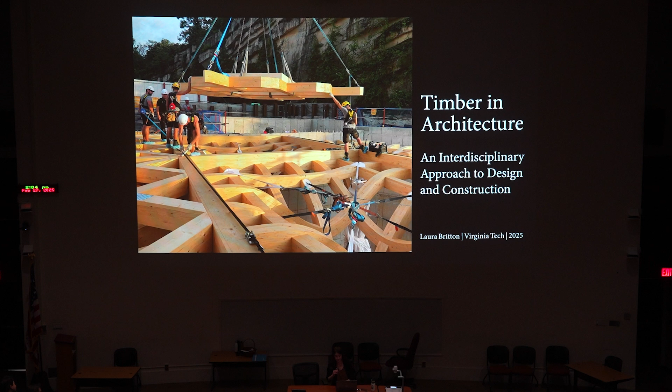To begin, Shigeru Ban Architects is a global practice. We have offices in Tokyo, Paris, and New York, and over 165 works worldwide, including paper, timber, and other materials.

Sorry, am I losing the mic? I could also just shout if that helps. Would you be fine holding it? Yeah. Okay, sorry about this. Is that okay? Okay.

In 1985, Shigeru got his first professional commission, right out of undergrad. He was commissioned to design an exhibition of Emilio Ambasz's work, and in the process, he discovered paper tubes at the center of fax paper rolls and rolls of fabric. He decided this was too useful of a material to throw away, noting that the paper tubes were strong, lightweight, inexpensive, recyclable, and available worldwide.

Later that year, he was commissioned to design an exhibition of the work of Alvar Aalto. He had initially hoped to use wood as a nod to Aalto's Viipuri library ceiling, but given the cost and waste associated with using this for a temporary exhibition, he opted for paper tubes instead.

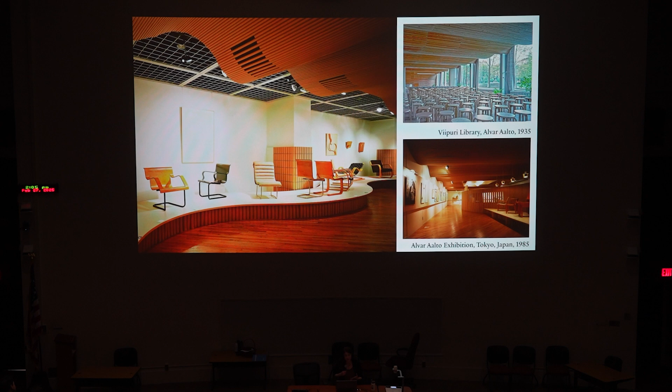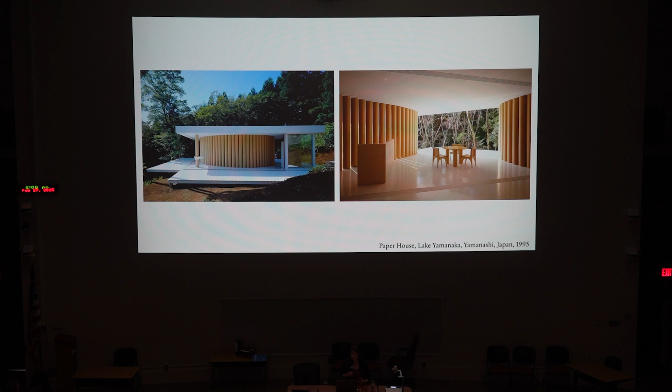A decade later, in 1995, Shigeru designed a weekend home for himself called the Paper House. It's the first building in the world that was permitted to use paper tubes as primary structure. But Shigeru often jokes that he hasn't seen it since because he just doesn't have the time.

This paper tube work is probably a bit more familiar as Shigeru is constantly engaging with humanitarian work. He's designed disaster relief shelters around the world, and this typology is called the paper log house. In the upper left, you can see the original paper log house from 1995 in Kobe, and the other images on screen are more recent iterations, adapted to the local climate, culture, and construction practices.

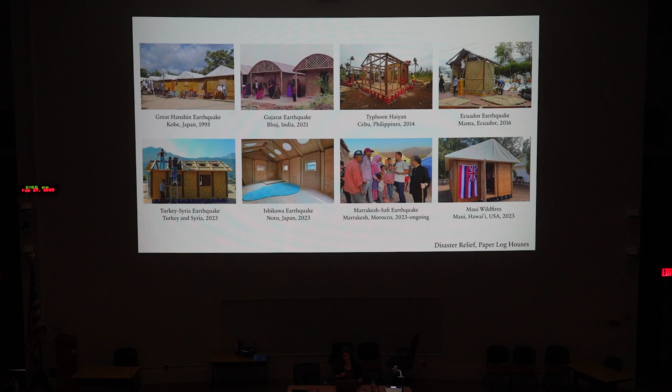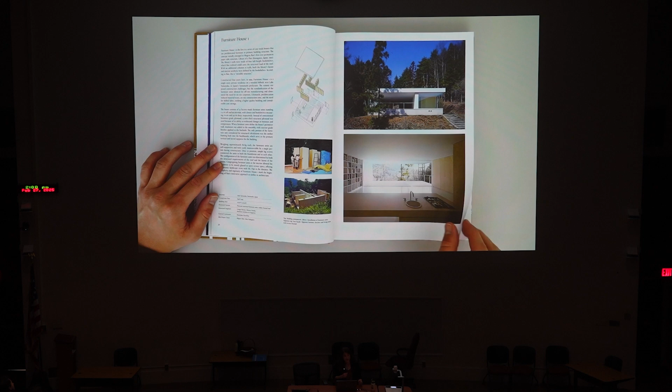So we'll take a quick look at Timber and Architecture. The book begins with three guest essays to contextualize the importance of the subject of timber. There's a foreword by the environmentalist Paul Hawken, and then Shigeru's own essay, Why I Love Wooden Architecture. Next, we have Hermann Blumer's recounting of his career trajectory from carpenter to timber engineer. The body of the book presents 45 works from conception through to the completion of construction, as Noah mentioned, which demonstrates the merits and challenges of building with wood.

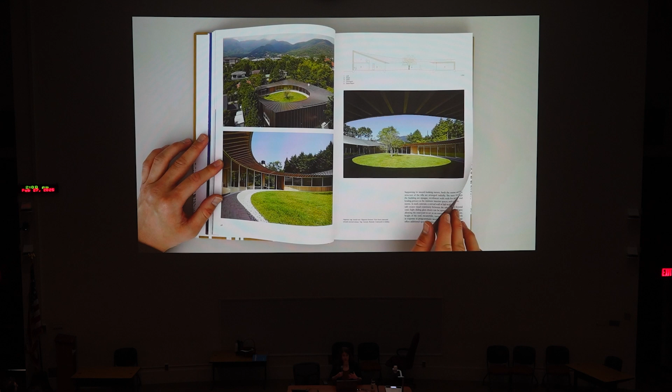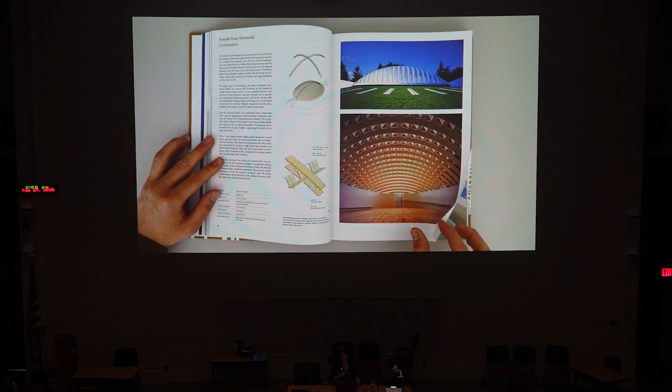This isn't just the glossy finished image of what we wanted the building to be, it's all the struggles that it took to get there and how constraints informed the design process. The projects range in scale, budget, and program, from prefabricated wooden houses to parametrically modeled glulam grid shells, showing the true spectrum of what you can do in wood.

The book concludes with an index of all of the work that Shigeru Ban has done in wood, both unbuilt and built, and also our current work in timber. SBA has more than 75 built works in timber around the world.

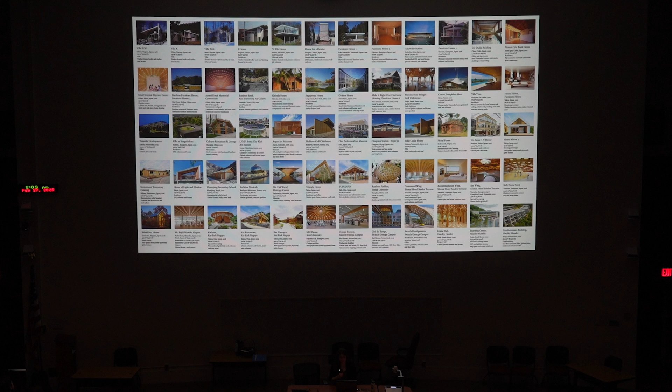One important point in organizing this book was not to go chronologically from the 80s to the present, but instead to arrange the projects thematically according to structural typology. This helps show the influence of budget, code, regional tree species, access to skilled labor, and even the local fabrication capabilities.

But before we dive into the projects themselves, we have to stop and ask: why wood? This is something that my colleagues and I are asked nearly every time we present.

Wood is a beautiful, versatile material with diverse structural possibilities. It's sustainable and renewable and can often be locally sourced. With off-site fabrication, timber construction sites are typically cleaner and safer, and construction schedules are typically quite short.

You may be familiar with the term biophilia. People naturally feel better and healthier in buildings with visible natural materials, and psychological studies have shown that this also increases productivity.

Now more than ever, it's imperative that everyone from architects and builders to clients and even the general public gain an understanding of how construction impacts the environment. Issues of waste, permanence, and material selection are crucial considerations in a holistically sustainable approach to design and construction.

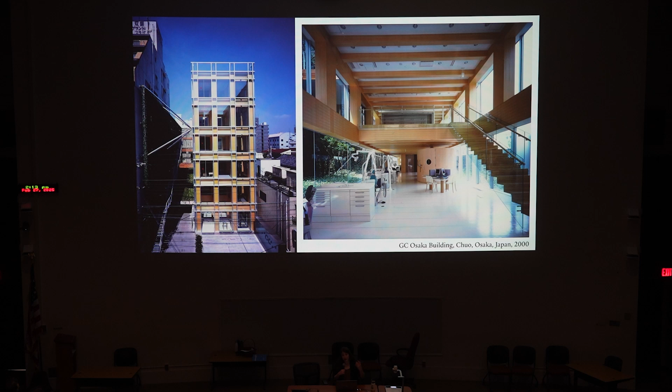This is an older project, about 25 years old. Ironically, Shigeru found that in Japan there are some of the most restrictive building codes, so he can't build in mass timber in most urban conditions in his own home country. The misconception in this case is that mass timber buildings are not safe, but in actuality, the building code just hasn't caught up to the realities demonstrated by fire testing.

Shigeru grappled with this in the year 2000 when he was commissioned to design a new office and showroom for a dental company. Since a timber structure wasn't allowed, he opted to work with steel for its strength and ability to span long distances. Steel typically requires a fireproofing layer known as encapsulation, which could be drywall, for example, preventing structural damage in case of a fire. This is typically clad with a finish-grade material to improve the appearance.

But subverting the logic, Shigeru demonstrated to the code officials that wood could actually be used to fireproof steel. Fire resistance tests demonstrated that 50 millimeters of wood, about 2 inches, adequately addressed the building's 1-hour fire rating requirement. So he used 2 layers of particle board with a finished layer of plywood to encapsulate the steel. Despite not being a timber structure per se, the building retains the warm aesthetic of wood.

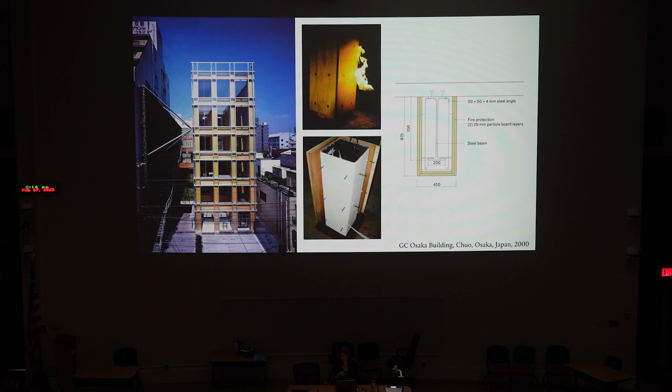More recently, he had a similar set of conditions, again in Japan. This is Tamadic Nagoya. The aerospace and automotive engineering company was particularly interested in biophilia, wanted a mass timber building, but was not allowed to have a mass timber building in an urban context here.

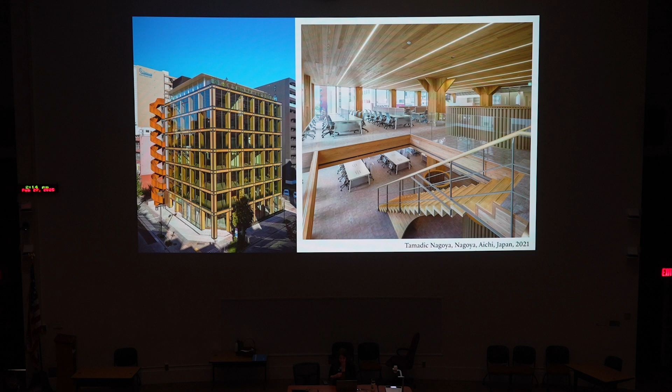So to satisfy the client's aesthetic and environmental desires, this 8-story building uses CLT, cross-laminated timber, as permanent formwork. So in the diagram on the right, first the rebar is set up, then a box is created with cross-laminated timber, it's filled with concrete, and instead of removing that formwork, it's left in place as the interior finish for the building.

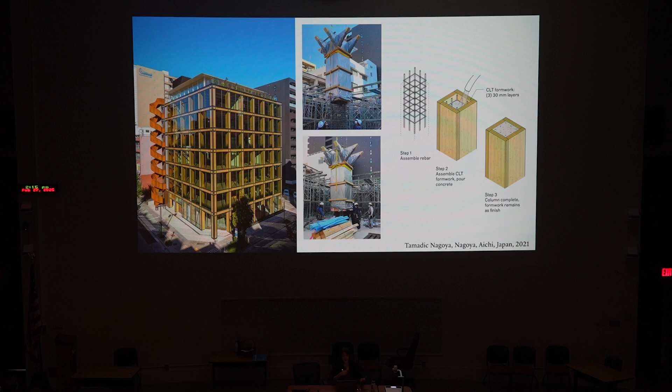The use of permanent formwork has many benefits, most notably the biophilic benefits of wood, and a shortened construction schedule from not having to remove that formwork, but also a reduced carbon footprint by not having this sacrificial material that would literally have gone in the trash. Additionally, no further materials were needed for a finish layer.

Returning to our list, the availability of materials and skilled labor could also be a deterrent for using timber. Simply selecting wood doesn't make it a sustainable choice. For example, if you're considering spruce from Switzerland and your project's in California, choosing that wood does not make it sustainable. And sometimes the topic of local materials is less about what wood species are regionally available and more a matter of which building materials are locally available.

So in one of SBA's early projects, Shigeru was commissioned to design a house on a remote wooded hillside. It was very difficult to access with construction equipment. And so the only material that Shigeru could get to the site was plywood.

He decided to design prefabricated plywood furniture units - closets, bookshelves, other casework. And that casework was then used as the structure for the building. So instead of having freestanding columns, he had a bookshelf that acted as a column.

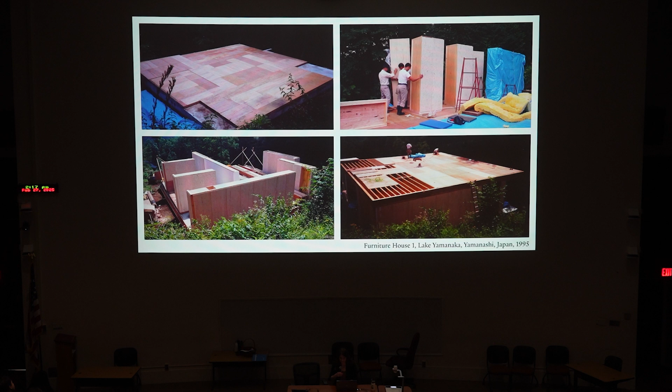So as we continue through this list, hopefully you come to understand that these potential pitfalls are also opportunities for innovation. It's the chance to think creatively and materially and to engage structural engineers, fabricators, builders, material testing facilities, and code officials, among others.

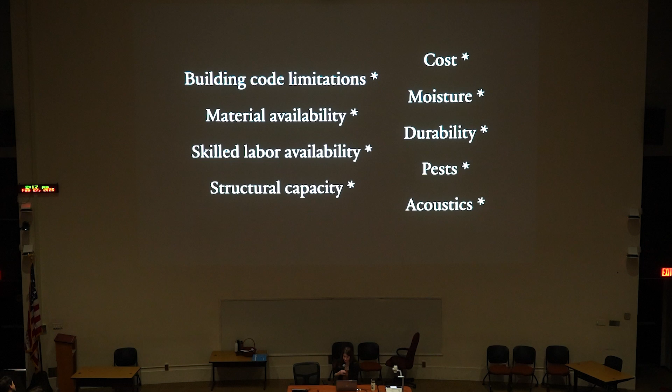So that's all the common sales pitch for why wood. That could apply to any architect from any firm who wants to use the material. But why specifically does Shigeru Ban have an interest in wood?

Shigeru actually wanted to be a carpenter when he was young, and so he's always had this specific, tangible relationship to the material. And he acknowledges the limitations of wood - that's precisely what intrigues him. So similar to that list of why not wood, he wants to operate in that space of trying to find the problems and exploit them.

Whereas steel and concrete can easily take on any number of shapes, you really need to understand the properties of wood to optimize its structural form. And by leaving timber unencapsulated, this allows the material to serve as both structure and finish, which is a materially authentic approach, expressing the beauty and efficiency of rational structural forms.

To do this, we need to collaborate. So from the outset, SBA engages a core team of engineers and fabricators and builders to see these real-world constraints as opportunities. Shigeru has great respect for his collaborators, so his introductory essay in the book is devoted to his close working relationship with these three structural engineers: Gengo Matsui, Frei Otto, and Hermann Blumer.

With Gengo Matsui, Shigeru brought his early paper tube concepts to fruition, advancing beyond simple upright columns to complex building forms. This was further advanced with Frei Otto. Here, Shigeru fully delved into form finding, and you can see the influence of Otto's Mannheim Multihalle on Shigeru's Japan paper tube pavilion.

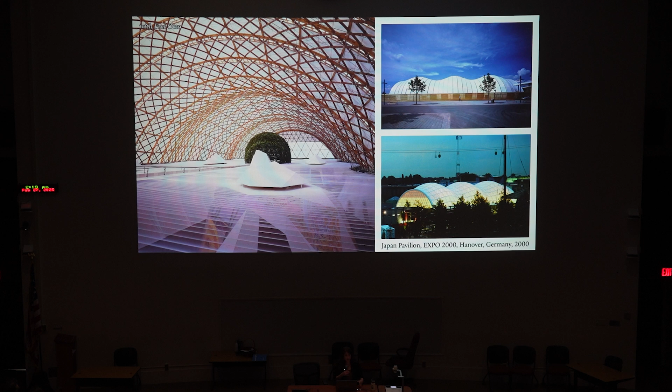Okay, does everyone know what mass timber is? Yes, okay. We'll do a very, very brief overview here.

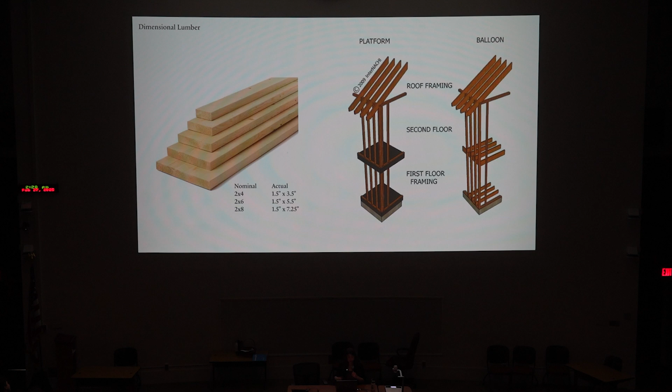In contrast to dimensional lumber, which is composed of a single piece of wood cut from a solid log, engineered wood products are manufactured wood products. They're a composite that could be made from wood veneers, strands, particles, and either an adhesive, nail, dowel, etc. So graduating in size, mass timber is also an engineered wood product with lumber from small diameter trees bound together by the same adhesives, nails, or dowels.

And this has two primary advantages. First, it dispels any myths about cutting down the rainforest - no, we're using small diameter trees, so we don't need old growth trees. Second, because it's a composite, mass timber is actually a standardized product with predictable strength characteristics. So by using multiple pieces of wood in a single member, you're homogenizing the structural profile.

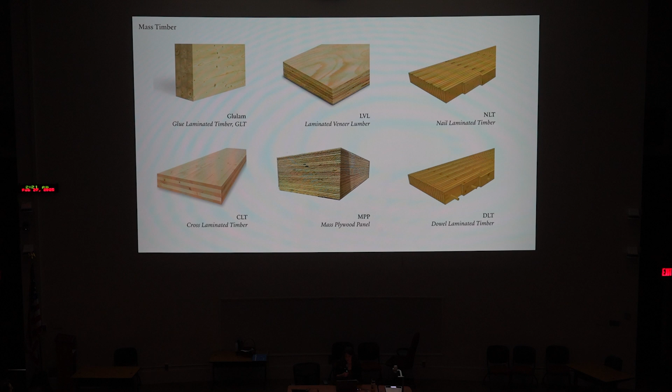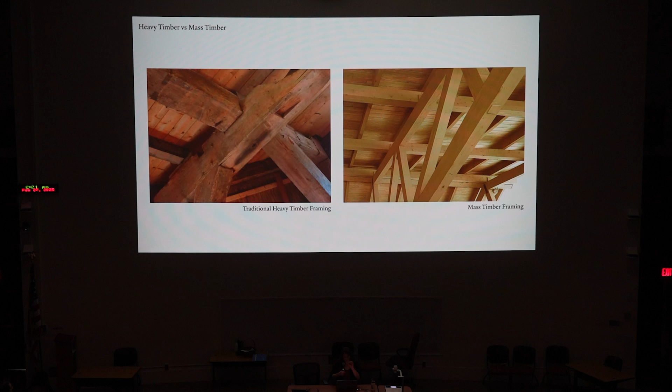Common examples of mass timber include glulam, cross-laminated timber or CLT, LVLs, DLT which is dowel laminated, NLT which is nail laminated. Mass plywood panel is a newer one, that's MPP, and dowel laminated timber, which is DLT. So on the left here, you can see an example of heavy timber, so that's solid wood. And on the right, you can see an example of mass timber, where you might be able to see the tiny joint lines in those individual beam members.

Before we actually dive into the projects, we'll do a quick recap of 10 key considerations to keep in mind when you approach a mass timber project. These points are applicable regardless of the complexity - whether it's a simple house or a complex grid shell, these considerations remain the same.

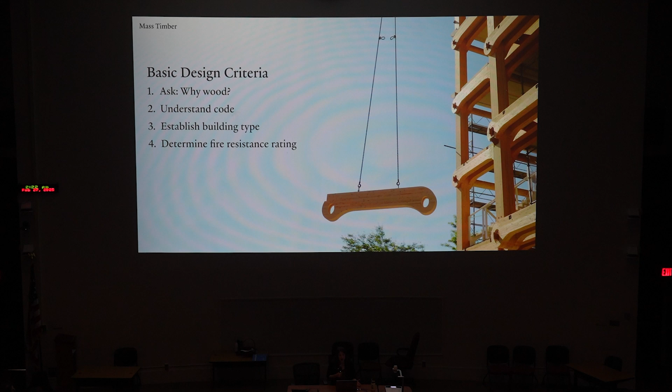So first, we have to ask, why wood? Is this the right material for the project? Oftentimes, a hybrid solution is the appropriate response. Next, we review the building code to understand what you can do in a given jurisdiction and establish the building type and the fire rating.

From here, we can establish the structural grid, and that would involve considering spans and member sizing in relation to vibration and deflection. Once the grid is established, then you can think about the MEP strategy. Are the building systems going to pass through the structure or bypass it on the underside or above? Will it be exposed, etc.? And lastly, how do we optimize the volume of wood to both minimize material waste and site erection time?

And then we can think ahead to constructability. Design for economy might not sound like the most fun topic - it's literally the most fun I have all year. It's like trying to solve a puzzle with the smartest engineers you can imagine. So ideally, you want to meet with these potential engineers, mass timber suppliers, etc., at the outset of the project so that your design is informed by these real world factors.

As you're considering species of wood, you have to think, is it native? If you're in the Pacific Northwest, you're most likely thinking of a spruce pine fir material. Or if you're in the South, it's more likely a southern yellow pine. You also want to consider the manufacturers and fabricators' geographic proximity to your site. So if you're building in Arkansas, you want to use southern yellow pine, but the best fabricator you know is in the Pacific Northwest. It makes no sense to source your materials locally, ship them up to Oregon, and then ship them right back down again. You might as well use materials in Oregon at that point.

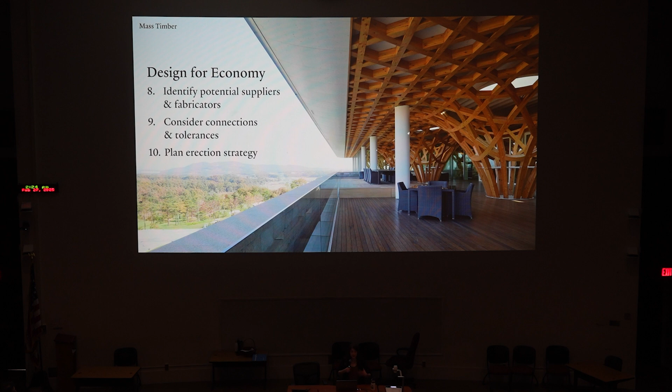And lastly, you begin to outline the site erection strategy. This is something we're often doing in schematic design, and it incorporates everything from how many truckloads of material it takes to get to the site, to how you stage the site to plan for construction.

We'll spend the remainder of our time looking at three primary structural typologies. First is post and beam. Next, we'll have space frames. And lastly, grid shells.

I know many of you have spent time in Switzerland and seen this project. I'm very jealous of Edward's class and wish I could take it as well. This is the Tamedia headquarters, our office's first building in Switzerland, and also the home of Hermann Blumer, who was the structural engineer for this project. Tamedia is the largest media company in Switzerland, and they've occupied the same riverfront site since the early 20th century. The client had three primary goals for a new 7-story building.

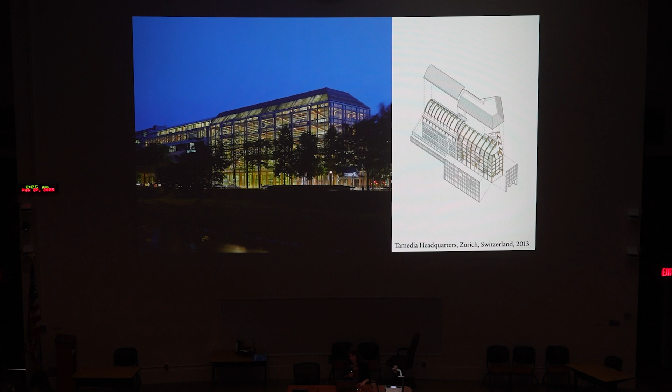The first was to create a workplace that feels like a living room. Next was to make the building feel transparent, both literally and metaphorically as a media company. And last was to maintain a reasonable budget. In response, Shigeru devised a timber post and beam structure wrapped in a glass curtain wall.

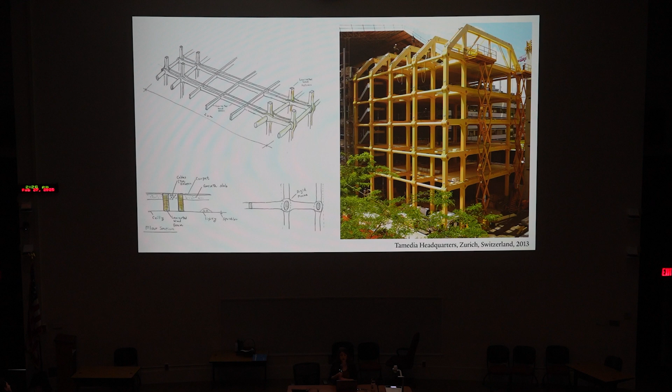The glulam columns and beams interlock in these innovative joints, which are secured by an elliptical dowel that prevents rotation. There are no metal connections. This form is both functional and elegant.

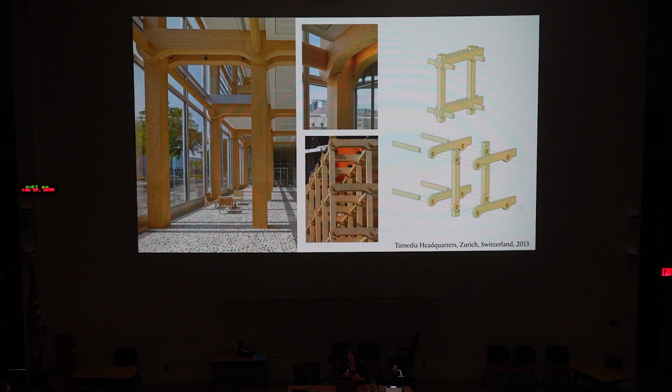Hermann identified that the structures were too large for the spruce beams alone, and spruce is a softwood. So he concealed a reinforcement plate, which you can see in the diagram on the right as the darker shaded portion. Those are made of beech, which is a hardwood, and this is a technique we often employ to use hardwoods to handle these higher stresses. This is a great example of a design concept that originates with Shigeru's sketch and is then further developed in collaboration with a consulting partner, the structural engineer.

Next, we'll move on to space frames.

If you ever have the chance to visit Aspen, Colorado, that's the home of our largest project in the US. This is the Aspen Art Museum. It has a woven wood and paper composite facade, evocative of the color and rhythm of the brick buildings that surround it in Aspen. This porous screen facilitates views into the museum as well as out towards the mountains.

Here you can see two views of the Grand Stair, an indoor-outdoor interstitial space behind the woven screen. Similar to the experience of skiing, the museum was designed to be circulated from the top down, so you ascend via this Grand Stair and then descend through the galleries.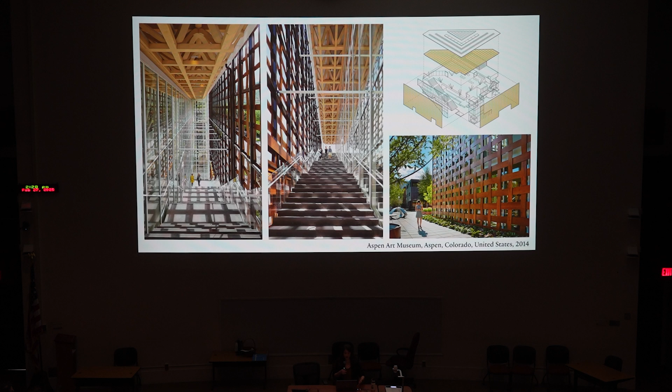Shigeru believes that the natural context is as beautiful as the art itself, so it's important to highlight the stunning views of nature first. Here you can see the timber space frame, which extends from the rooftop plaza into an indoor cafe.

The building is arranged according to the thermos principle, developed with Transsolar, a firm of climate engineers. In this setup, climate-sensitive galleries are concentrated at the heart of the building and surrounded by less climate-sensitive spaces such as lobbies, hallways, stairs, and offices. This minimizes temperature and humidity fluctuations, which is important for the proper care of fine art, and it also allows the perimeter zones to take advantage of the great views of Aspen.

For comparison, on the left we have Shigeru's initial sketch, and on the right the digital model used for fabrication. They're again quite similar.

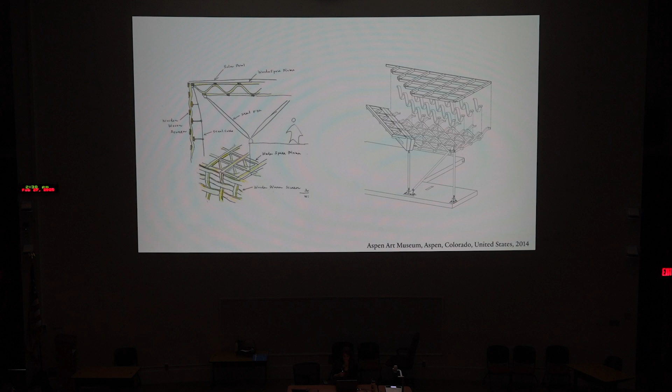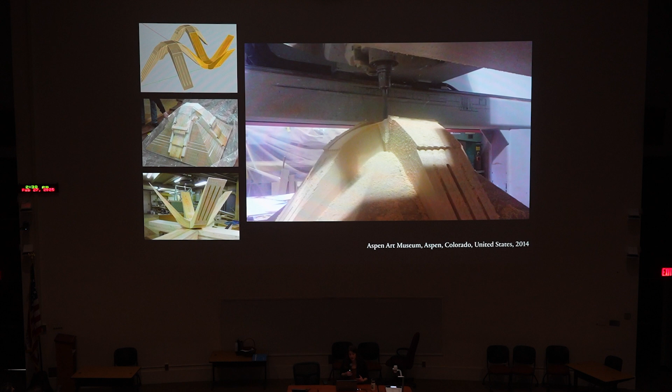But it isn't as simple as starting with a structural engineer. It was very difficult to figure out the approach for fabricating this. This timber structure went through several iterations, but ultimately cost was a driving factor as well as minimizing material waste. Here you can see some of the initial studies, which included bending and CNC routing. But ultimately, the webs were cut two-dimensionally from custom Baltic birch plywood, typically used for furniture.

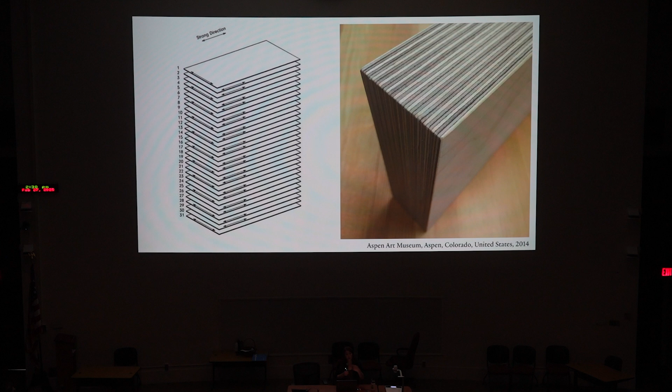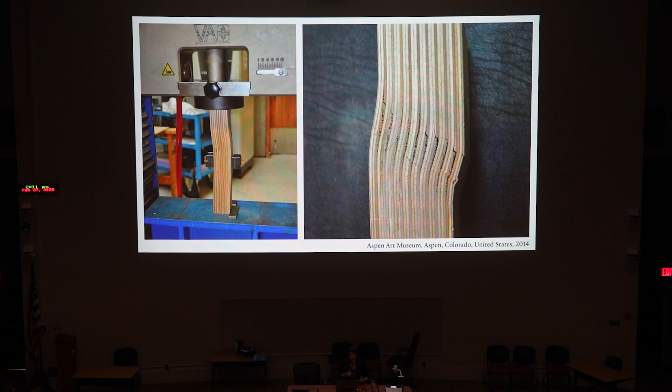I'm saying custom here—perhaps you can see in the image on the left the notation at the top that says strong direction. There are two plies that run in that direction for every one ply that runs in the alternate direction. This approach had never been done before for a building structure, so extensive testing was required to demonstrate the strength of the material.

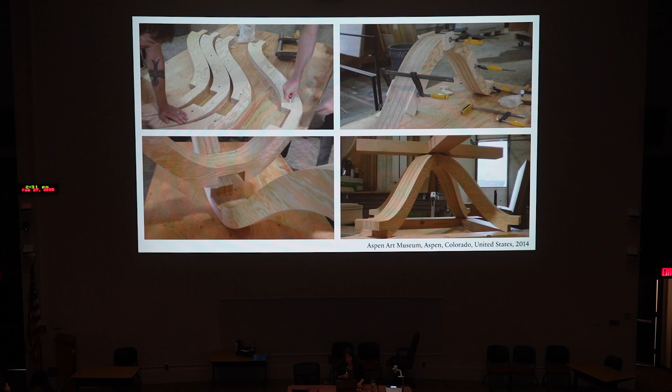Here you can see a mock-up of the timber structure being built. For the final design, spruce, a softwood, is used for the chord, whereas birch plywood was selected for the webs. Birch, a hardwood in this case, was used for these strong connections to reduce member sizes. And as you can see on the left, the web members are joined together with half-lap connections.

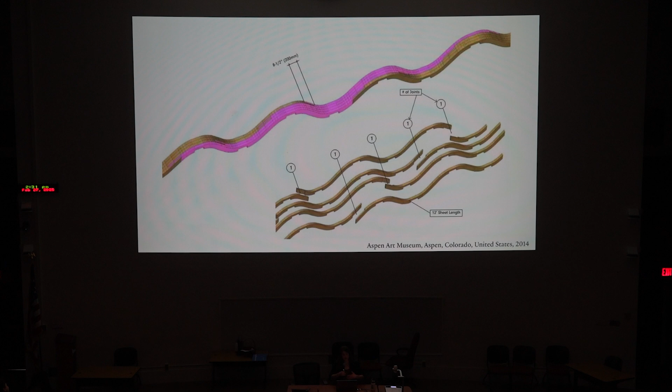The plywood came in 12-foot lengths, which were then half-lapped with scarf joints to create these longer members. In the upper left, you can see how these webs came together in Spearhead's shop—Spearhead is a fabricator we used for this project. The timber components were fabricated and shipped to the site in the longest possible transportable lengths in order to minimize on-site construction time.

You may notice this is a little odd for a space frame. Usually you see entirely linear members, but here you've got curved members, which may not seem as structurally efficient. However, it created more surface area for wood-to-wood connections, which prevented the use of exposed metal hardware.

This structure was developed again in conjunction with Hermann Blumer from Switzerland, as well as Greg Kingsley from KL&A, who introduced me to Edward, and I'm very grateful for that collaborator partnership. You're going to hear again and again these same firm names coming up, and it's not out of favoritism—it's out of this belief in continually advancing a project. So when you continue to work with the same individuals over and over, you take missed opportunities from past projects and build on them, add to them, and grow and advance the discipline itself.

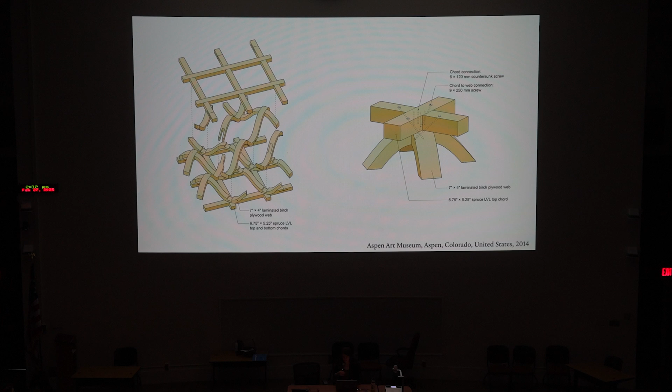So like the Aspen Art Museum, this is Triangle House, which features a space frame for the roof. But this is a much smaller scale, again for a private client. This building includes an 8-person office with a private residence above. The lower floors have a concrete structure to economically hold the load above, while the space frame roof allows for this large open living space on the top floor.

Despite the space frame being nearly a meter deep, there's plenty of daylight here. The space frame was made from European pine, selected because it was economical and readily available. At each node, up to 9 timber members intersect, as you can see in the lower right—that's a rather complex joint.

Hardwood joints, like what we had at Aspen, were considered here originally, but this wasn't possible due to the particulars of Japanese building code. So instead, a concealed steel plate was used—it's ultimately a simpler joint. It wasn't the preference in terms of design and structural resolution, but it demonstrates that regardless of challenging constraints, you can achieve the design vision you seek. You just have to find alternate methods of execution.

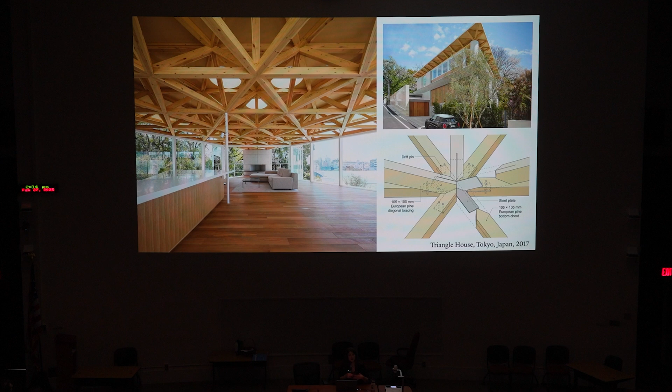Now moving on to grid shells. The Centre Pompidou Metz is perhaps one of Shigeru's most iconic buildings and one of the most well-known mass timber structures in the world. This also happens to be the first mass timber building that our office completed.

And though it's hard for us to imagine today, the client initially suggested switching to a steel structure, as did the original structural engineers for this project.

So in 2003, long before I joined the firm, the Centre Pompidou hosted a competition to design a new museum outside of Paris. The intent was to show more of their 120,000 works, but also to show larger works that wouldn't fit within the 18-foot ceiling of the original Centre Pompidou.

Given the architectural significance of the original museum, Shigeru saw this as an opportunity to build an unprecedented structure.

The museum was designed as an open pavilion in a park. So unlike its peer institutions, this museum is not a walled-off museum. There aren't large, heavy stone columns. And its 16-foot glass shutters are actually retracted to connect directly to the park.

So there's this idea that this isn't a classist division of who belongs in a museum. If you're sitting in the park and you happen to want to pass into the museum and explore a bit, it makes it feel like a much more comfortable environment than if you're not really sure how to approach the building.

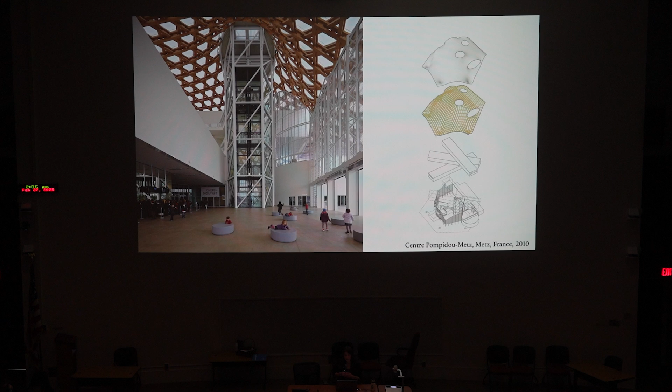Three gallery tubes below are oriented towards local landmarks. Here you can see the empty interior of one of these gallery tubes. This one is pointed towards the Metz Cathedral. And the idea is that you can locate yourself within the city while you're in the building.

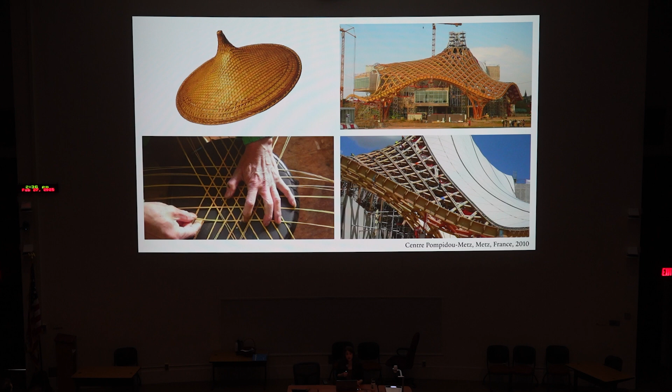For the iconic roof, Shigeru drew inspiration from two seemingly unrelated sources. The first was the cable net roofs of Frei Otto, which have a separate cable structure from the wood enclosure. And the second was the self-supported woven structure of a traditional Chinese hat, which made Shigeru question the necessity of the cable net in the first place.

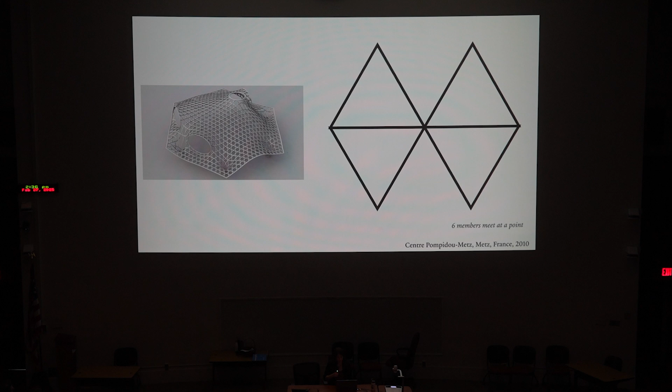In a typical triangulated grid, you'd have 6 members intersecting at a point, and this yields a very complex and expensive joint. So if you're considering the middle intersection of those triangles, that's 6 individual members coming together. But if you offset that intersection, you can reduce it to just 4 members coming together.

So here you can see the influence of the Chinese woven hat. By offsetting the grid, you simplify the method of construction. And that's the ingenuity of Metz.

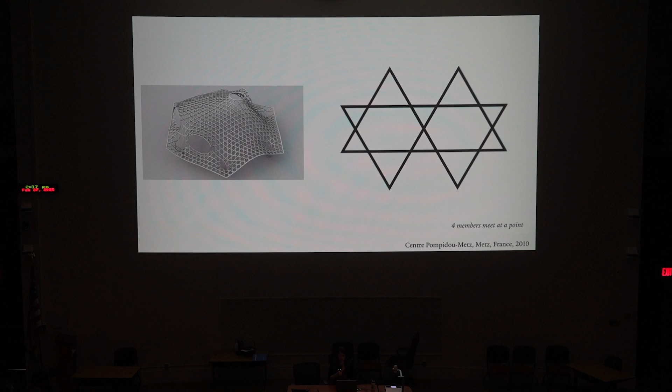The story of this building's structural resolution is really quite fantastic. So after the initial team of engineers proposed a hybrid structure, followed by a solid wood structure that was twice the roof's budget, the client said to Shigeru, no, you have to change it to steel.

But Shigeru wasn't deterred, so he went to Switzerland to find structural engineers who could take on this challenge. And at the airport, Shigeru was greeted by a Swiss man who he thought was a taxi driver. He got in this man's car, and he noticed paper tubes in the back seat. They're talking, and he thought this was a very brilliant taxi driver, and it turned out to be Hermann Blumer himself.

And this was the start of a relationship that has persisted to this day. Every complex timber project, we bring on Hermann Blumer.

Shigeru described his conundrum to Hermann, and Hermann immediately reassured him and said within a week he would have a structural solution as well as a cost estimate. So Shigeru felt a lot better, and he went back to Japan.

And truthfully, Hermann had no idea. He actually recounts this in his essay at the beginning of the book, that he wasn't sure how to do it, but he knew there was a solution out there.

Independently, Shigeru and Hermann both realized that they not only needed to simplify the grid in 2 dimensions by offsetting from a six-member intersection to 4, but they also had to offset the depth of the members. So rather than intersecting in plane, which would require a complex joint and much more complex fabrication, they actually offset the depth to allow members to bypass one another. So they're stacked.

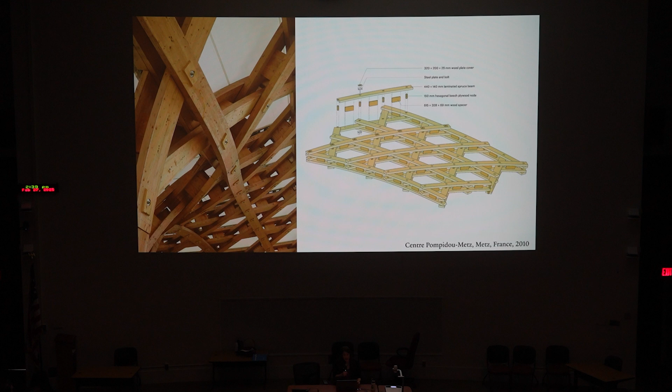The double curvature of this roof takes advantage of the digital fabrication processes that Hermann Blumer pioneered. And this was the catalyst for all of our subsequent mass timber works.

Here you can see a simpler interpretation of the Centre Pompidou Metz structure, which was adapted for a small spa in Japan overlooking a rice field. So this spa grid shell has a woven hexagonal pattern again, and the weave overlaps to allow just simple screw connections. Now we'll take a look at tree columns, which are also a variation of grid shells.

I know some of you have seen the evolution of this structural typology in Blumer Lehmann's shop in Switzerland. So at the same time that Shigeru was designing the Centre Pompidou Metz, he was also developing the Nine Bridges Golf Clubhouse, which is a noticeably different grid shell form. The building is essentially a box with a flat roof, but it's supported by these 3-story tall columns. Each column is arranged with a series of 12 radially oriented individual timber members. And you'll notice that the structure bears the same hexagonal and triangular grid pattern as the Centre Pompidou Metz.

However, this has a higher density of timber. So it's more slender members spaced closer together. And this allows for a more surface-like reading of the roof structure. So it reads kind of as a continuous form rather than spaced out apertures.

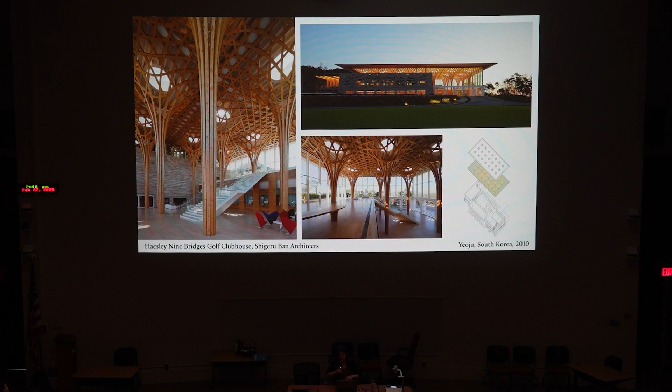The tree columns here are constructed from 3-dimensionally curved German spruce glulam, which takes advantage of the wood grain to take on a structurally efficient form. A more typical low-tech approach would have been to cut these shapes from a large flat sheet, but this method would have been materially wasteful, expensive, and less structurally efficient.

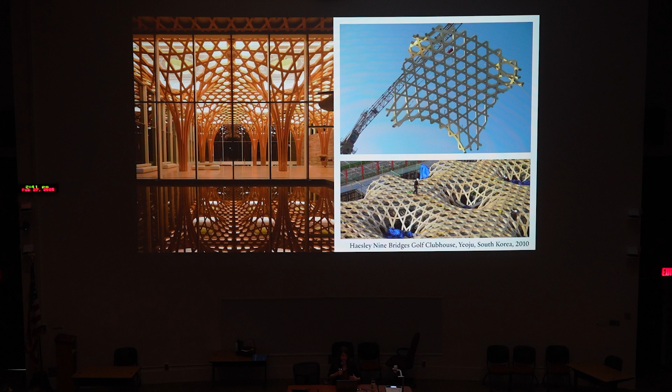10 years after the completion of the Nine Bridges Golf Clubhouse, the same client commissioned Shigeru to design another project on the site, and they wanted it to be evocative of the original building, but not a copy. So here, Shigeru was tasked to design media and executive training facilities for the golf club. For the main event rooms, Shigeru proposed that they be subterranean because it's very important for a golf course to be quite quiet. So the timber structure on the left, despite being really daylit, that's an entirely basement structure with skylights above. You might notice that this structure is quite a bit heftier than the original Nine Bridges Golf Clubhouse.

There are a few reasons for this. First, in the 10 years between the two projects, the Korean building codes changed. So that required more oversizing of the timber structure. And second, instead of having the twisting 3-dimensional curvature, here the wood members only bend in 2 dimensions. So you have an orthogonal grid here. And that allowed it to be built by local builders instead of the builders from Switzerland.

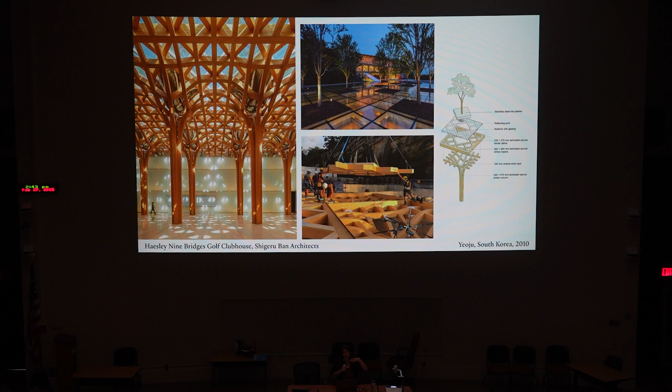And so the entire roof surface here, in addition to being skylights, has a layer of a reflecting pool. And then these tree planters with integrated drainage down the center of the columns. So adding all of that water and soil on top of the roof structure adds quite a bit of weight to it.

This project was also designed to be fabricated in Japan, meaning that it had to be quite a bit simpler than what was also possible in Switzerland a decade ago. So all of these moves to simplify the structure also meant fewer connections.

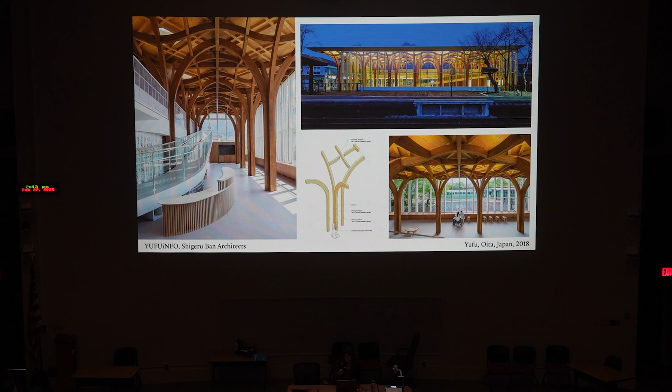So these three projects taken together highlight how a similar structural system can be adapted differently depending on budget, code requirements, and access to skilled labor. It also shows how collaboration with structural engineers and fabricators plays a large role in the actual image of a project and how it evolves over time.

Returning to a purer form of grid shell, the last built project we'll look at is the Swatch Omega campus in Biel-Bienne, Switzerland. At over 500,000 square feet, it's one of the largest mass timber building projects in the world.

The campus integrates 3 new mass timber buildings into a historic watchmaking campus. On the left is the Omega factory, which is rectilinear. On the right, the Swatch headquarters, which is more willful. Between the two is Cité du Temps, the Swatch Omega Museum. These buildings share a design language reflecting the unified Swatch Omega brand, but also express each building's individuality through contrasting structural forms. We'll take a quick look at the rectilinear buildings, but focus on the grid shell.

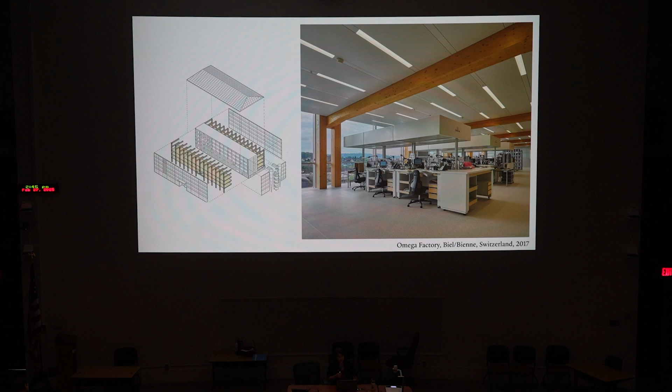The Omega factory was built first, and Omega is known as the timekeeper for both NASA and the Olympics. So it was fitting to have this clean rectilinear form representing the exacting precision of Swiss fabrication. This building is a post and beam structure with a rigid concrete core flanked by timber watchmaking workshops.

Working conditions were a primary factor here, most notably literal cleanliness. The Omega factory is the first mass timber building in the world to achieve clean room standards, because it's important not to get dust in your watches. This certification was important for craftsmanship, but also employee health, with a constant stream of ventilation keeping the environment dust-free. You may not see air registers in the ceiling because everything comes through tiny perforations in the ceiling panels, creating constant airflow throughout the day. This can create a dry environment if not managed properly.

Also, one concern you might hear about mass timber structures, if someone is building a lab building for example, is that mass timber vibrates. It's a very flexible material, which makes it safe and resilient in many ways, but this is not desirable if you're creating intricate small watches. To counter this, a concrete topping slab was added to the CLT structure to keep it from vibrating, which is necessary for making the watches.

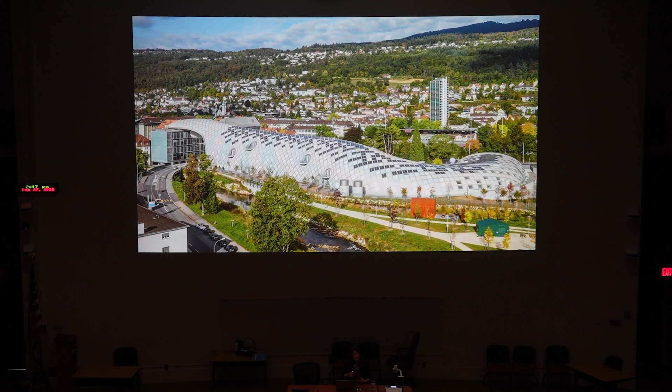In contrast to the maturity of the Omega building, Swatch is a much more playful, innovative, and provocative brand. Though the serpentine form you see here appears rather unrestrained, the facade and structure are each responsive to practical design constraints ranging from code and zoning to material properties and building services.

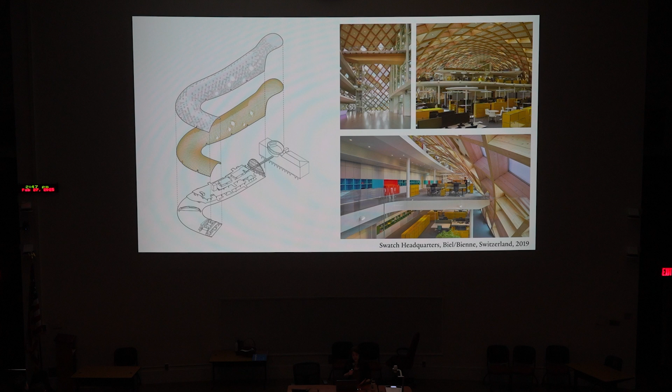The sculptural grid shell covers 4 office floors connected via 3 concrete cores. The timber structure is composed of a 7-foot grid of interlocking timber beams that seamlessly transition from the wall to the roof structure. The office space below is open and flexible, fostering collaboration.

The idea here is the entire company under one roof. There's no private office that's off limits to an executive. Anyone can be open for collaboration.

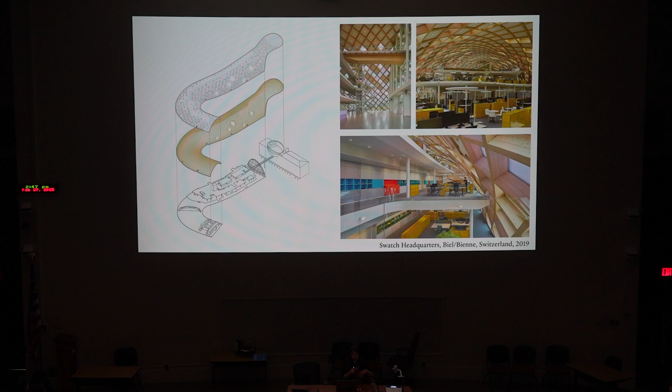The Swatch headquarters was designed in a truly contemporary manner without traditional construction documents. Instead, a parametric model accounted for the specification of 7,700 timber members with a precision of 0.1 millimeters, allowing the wood to fit together perfectly on site like a puzzle.

In a more typical building project, you might see errors impacting up to 15% of parts delivered to the site. But because of this approach with the parametric model, this complex grid shell had only a 0.11% error rate, meaning only 72 of the 62,792 prefabricated roof elements that came to site had an error.

This is a testament to the interdisciplinary and collaborative nature of this design project. SBA worked extensively with Hermann Blumer of Création Holz, as well as digital facilitators Design to Production, who created the digital fabrication model and resolved all the conflicts that would have occurred from integrating building services into this project.

This dynamic team has worked together for nearly 2 decades, beginning with the Centre Pompidou Metz. A fun side story is that we didn't actually know this entire consulting team had worked together on Centre Pompidou Metz — the digital facilitators were contracted directly by the builder on that prior project. As we learned who had a hand in creating these projects, we began bringing them in earlier and earlier to use their expertise from the outset.

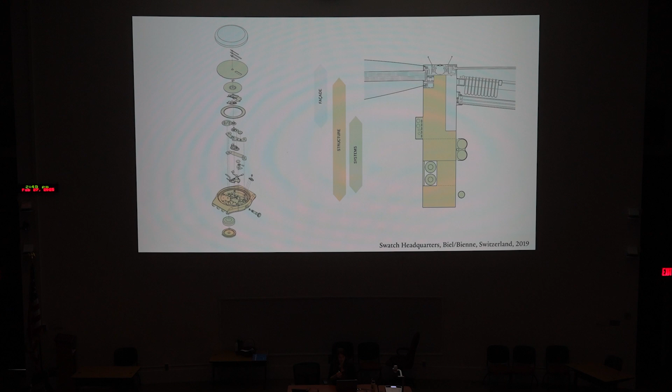So here you can see the building envelope, which integrates structure, building services, and the facade. Since the maximum footprint of the building was fixed due to site constraints, an unnecessarily thick facade envelope would have reduced the building's usable floor area, and this wasn't viable for the client.

So to resolve this, Shigeru drew inspiration from the original Swatch watch. The reason Swatch watches had become famous was that they integrate components directly into the plastic case of the watch itself, which reduced both the cost and the thickness of the watch. Shigeru's approach here was similar.

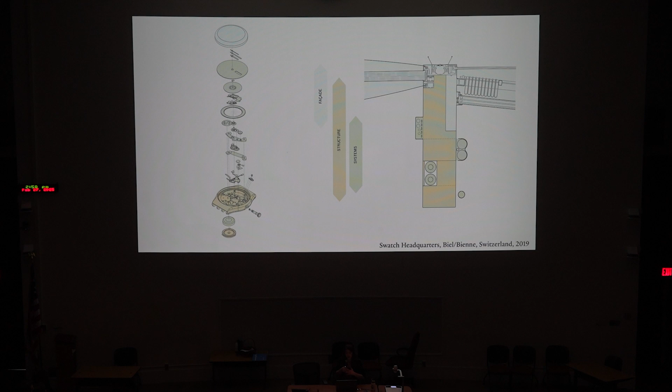Instead of layering discrete, separate layers of structure and then building services and facade on the outside, he allowed them to pass through one another. The facade nests into the structure, and the building services pass through the timber structure.

This is quite a bit more complicated to coordinate, and hence why we worked with Design to Production. So prefabricated openings were tailor-made to the size of electrical cables, sprinkler pipes, and cooling pipes, with cutouts staggered and mindful of the wood grain so that the structure would not be weakened.

The roof is a 120,000 square foot surface with 2,800 apertures arranged in a very spirited pattern. It might seem randomized, but each has a particular reason.

First we have the ETFE cushions, which are white and pillow-like. If you're not familiar with that material, it's kind of like a fabric sheet. You can see through it, it's translucent, it glows in the daylight. And if you're looking at it from the exterior, it'll glow at night when the lights of the building are on. This is a great material for diffuse daylighting, which helps to create a glare-free environment for offices.

Next, we have CLT panels at the high points of the roof to reduce solar heat gain, and PV panels on the top and the south side to offset the building's energy consumption.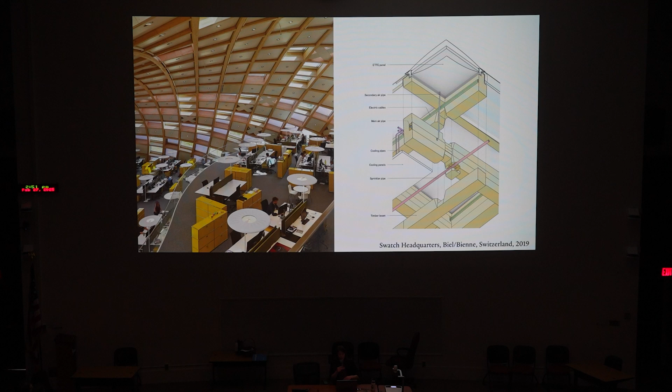The Swiss cross form that you can see towards the middle of that image actually acts as both structural bracing and acoustical absorption. And at the lower level, that's the only place where there are glazed panels because there are views out to a neighboring park.

The Swatch grid shell reaches over the street and sits atop Cité du Temps, which is the third building on the site. This museum and conference center acts as the interface between the Swatch and Omega brands. An interesting issue to consider here is the differential movement of each of these buildings.

This museum incorporates the architectural language of its neighbors, with playful concrete arches at its base and a rectilinear timber structure above. The mansard roof is evocative of the campus's historic buildings.

The Omega factory has a concrete core and topping slab, but Cité du Temps is an entirely timber structure above the ground floor. So it has glulam columns and beams, and CLT floor slabs and core panels.

This is an outwardly simple building, but the interfaces require great attention to detail. As you saw on the previous slide, the Swatch grid shell sits right on top of this building, and on the opposite side, it actually connects to these historic buildings on the campus.

Despite being such an enormous project, the buildings were constructed from 160,000 cubic feet of certified Swiss timber. It's kind of a difficult number to wrap your head around, but considering the growth rate of Swiss forests, it would only take 10 hours to regrow this quantity of wood domestically. That's 0.1% of Switzerland's annual timber production to create what we think is the largest timber building project in the world.

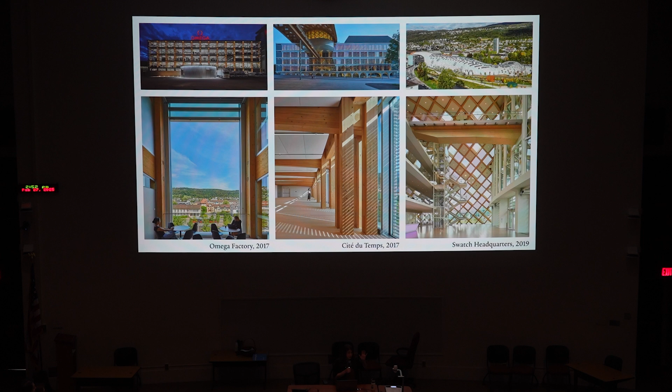To conclude, we'll take a look at just one project our New York office is currently working on, which is the Kentucky Owl Park. This is a 500,000 square foot bourbon distillery in Bardstown, Kentucky, sited on a 420-acre reclaimed limestone quarry.

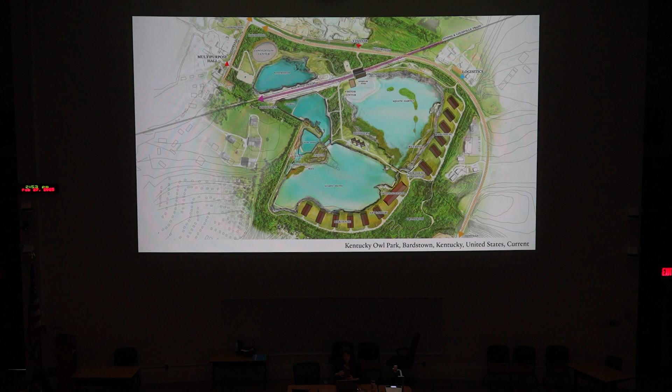This distillery sits on a peninsula at the center of the site and is surrounded by production buildings, including a bottling center, a craft cooperage, which is where the barrels are made, rick houses where the bourbon is aged, as well as a visitor center and a train station.

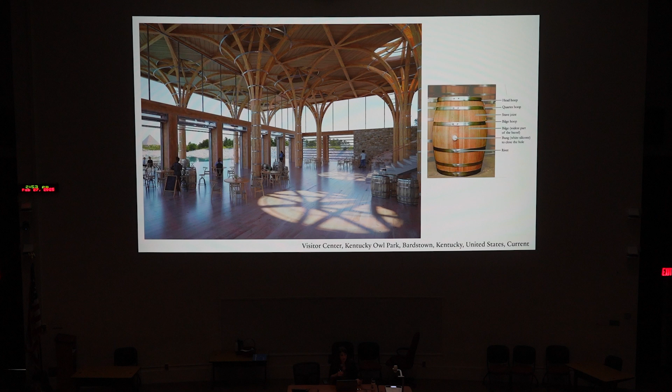For the visitor center, we drew inspiration from the structure of a bourbon barrel itself. The dendriform columns are a combination of timber and steel, evocative of the wood staves and the steel hoops that make up a bourbon barrel.

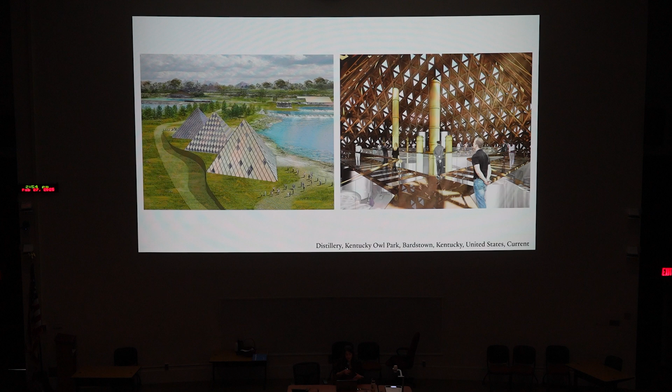And the shape of the pyramid actually comes from Shigeru's pragmatic idea to efficiently house this 60-foot tall column still at the center of the building without creating a large rectilinear mass in the center of this site. So this minimizes the overall volume of the building. And then in the last pyramid, the bourbon is bottled in preparation for aging.

The roof structure here might seem quite familiar. It's an evolution of the Aspen Art Museum's wooden space frame. So here again, with each project, we're building on past studies, but the complexity here comes from the angle of the space frame and how the 4 faces of the pyramids meet and come to those joints at the intersections.

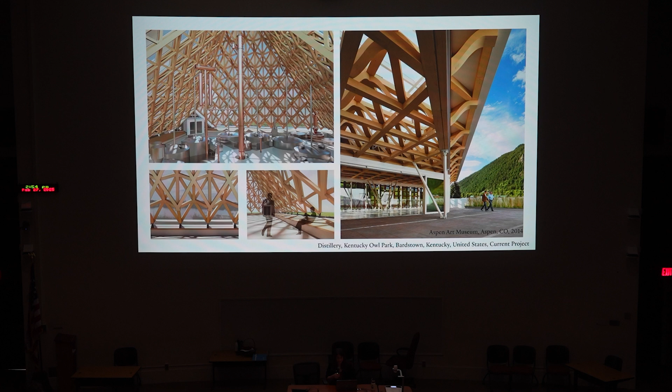To do this, we once again teamed up with the structural engineers from Création Holz and KL&A, as well as design facilitators Design to Production and fabricators Spearhead.

This is a sheet from our schematic design set. We call this a reference geometry drawing. So in the diagram at the left, green represents the outer face of glass, blue is the top face of the upper chords, and red is the bottom face of the lower chords. So in actuality, we're studying 3 nested pyramids geometrically.

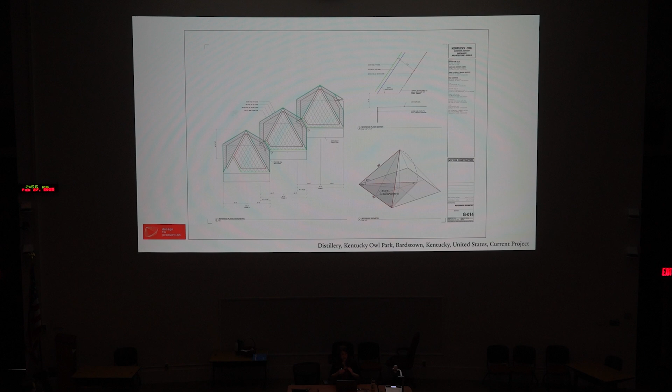And we document this geometry through trigonometry rather than rounded numbers. So we keep a parametric approach as long as possible because changes are bound to happen and the complexity only increases over time. So our clean 90-foot dimension applies to the outer face of structure, which aligns over the foundation.

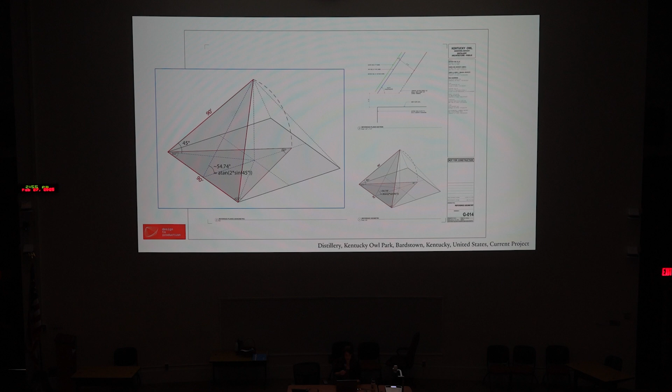And then we begin to consider facade module sizing. Not sure if you can read all of that down there. It's quite crazy to have that as your dimension string.

So this is schematic design. We don't know who our facade manufacturer is yet. This needs to stay in this format until we know every last detail and we can get down to a reasonable measurable size of tolerance.

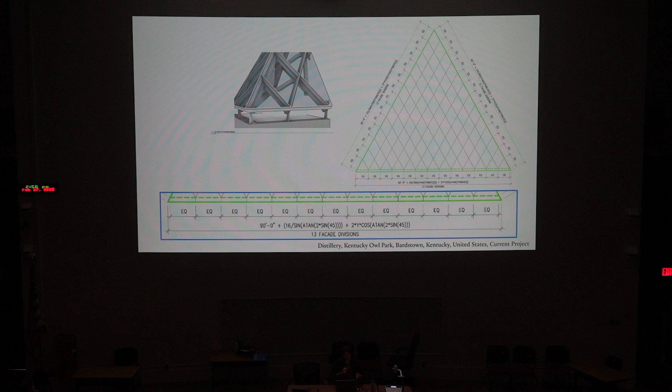In parallel, we're working with our fabricators Spearhead to optimize our material sheet layouts. So thinking about the structural form, the size that the material comes in, and how we should change our form so that we don't have too much material waste.

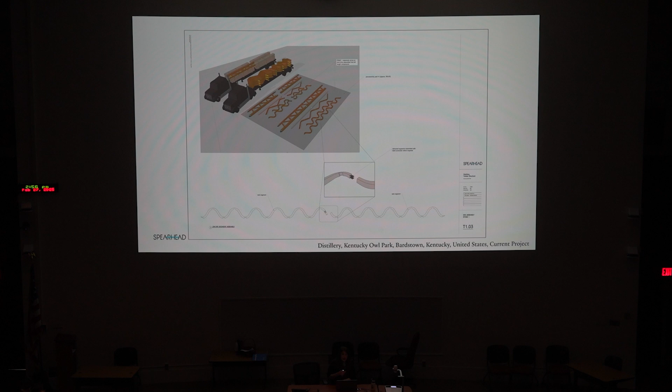And then we're considering maximal transportable lengths. So literally, what trucks can we get to the site? This gets down to turning radii driving into Kentucky.

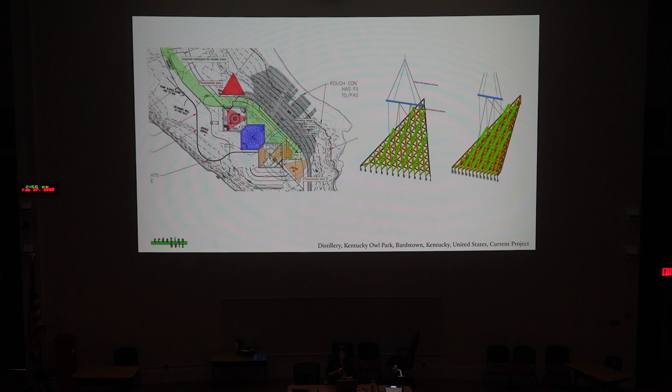And in addition to member sizing, our structural engineers also contribute to the assembly sequencing, including site staging and maintaining the structural integrity of each face as it's lifted into place. So this is, again, all only at the schematic design level.

So we'll conclude with an animation of the project.